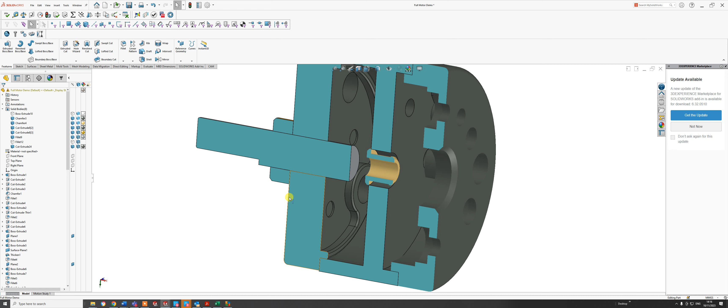As said in the previous video, I need to make some alterations here. I need to get this hole size down to that size there. That was a guess previously, so I'm just going to measure that hole size. Let's see what it says. I'll just move that over to one side.

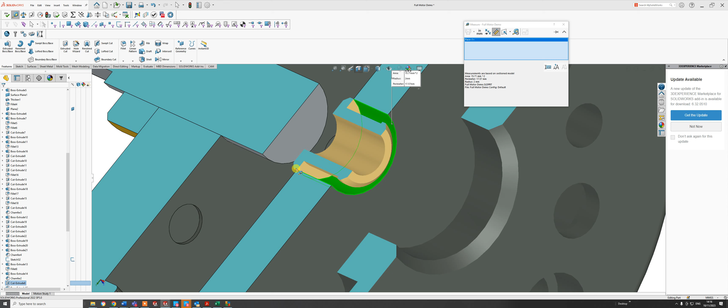So the radius is this, it's a 4mm hole, which is what that measured out to be. Let's escape and measure the other part on that one. Let's do the inside of this just to show what that is. That's 1.5 radius. So all I'm going to do is right-click on there and go into edit sketch.

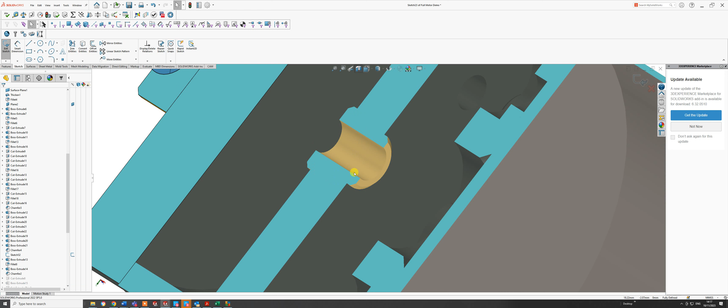What has it done for me? Absolutely nothing. Oh, there's that sketch there, because that's the 4mm shaft. I think when we did that, let's go back and have a quick look how we did that. I think it's in relationship to this half shaft to go through. I'm just going to double check. Take this thing apart. Oh, there's one out. Let's just double check.

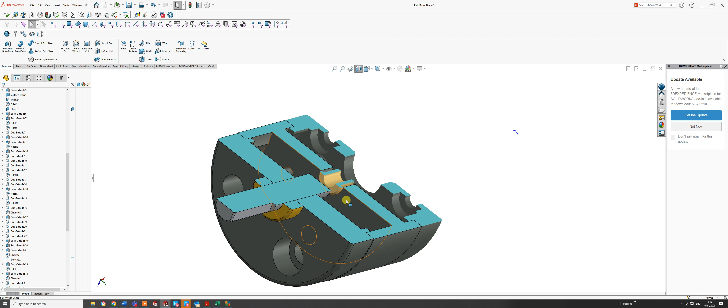That centre bush actually is a lot smaller than we anticipated, so just bear with me a second there. On the underside, it should be approximately 3mm, and on the other side, the bigger side, it's actually gone to 4mm. So I rotate it - that there is 3mm and this here is 4mm.

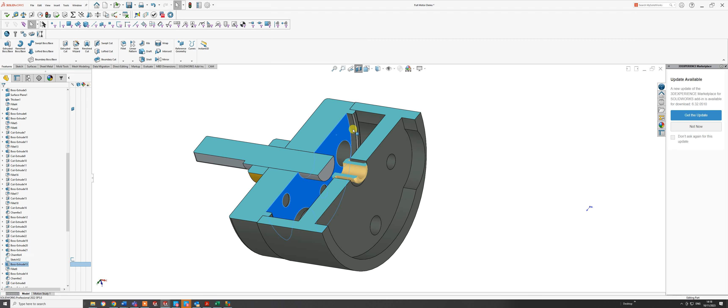So this hole here really shouldn't be there at all. Well, it should be there, but just to these sizes here. I think the easiest thing to do is just hide this, and hide that, so it gives a little bit more clarity. And let's bring this back to there. So it's this hole here we need to look at.

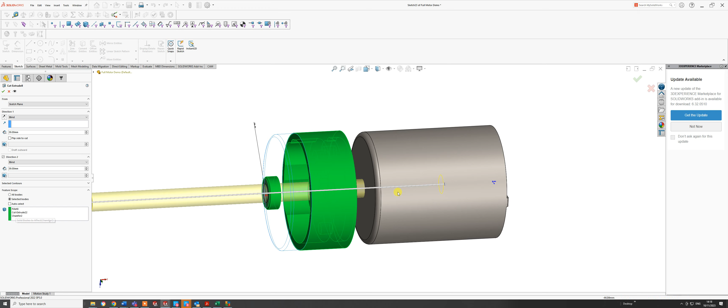So if I go to edit feature, let's see what feature we've got and where that is in our tree. Okay, so we've got several things - we've got that fillet there, got that there, and we've got that there. So what I'm going to do is take off that centre thing, so we don't need to do that. Let's just, it should be the top feature only.

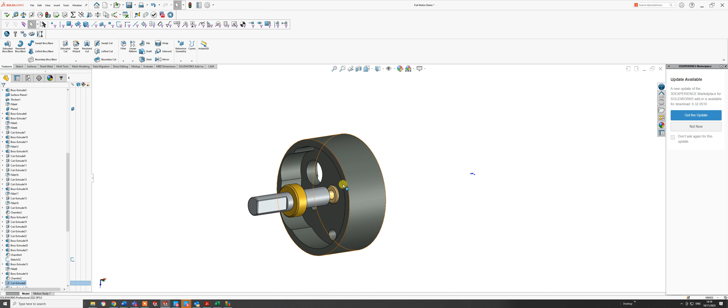So that one, that's the top one we want. That one we don't want, so let's hide that. Let's delete that one, and it will show here that the hole there is being taken down. Let's have a quick look at this and see what happens. Let's go back onto the section tool, and there we go. We are back to normal.

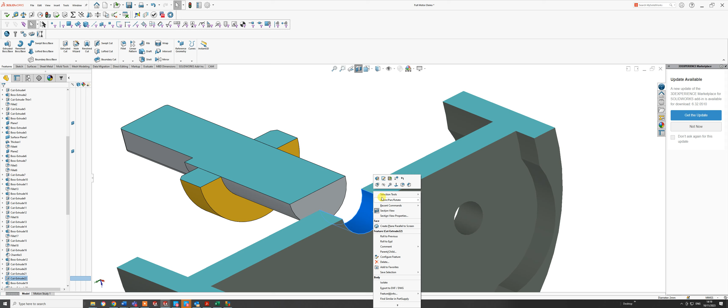So it was just, I'd say, a quick modification. It wasn't actually, because if I now just hide this, let's see what hole size this is. Let's go to edit sketch. There we go, there's the hole size we needed. It's 3mm, absolutely fine, so we don't need to do anything else for that.

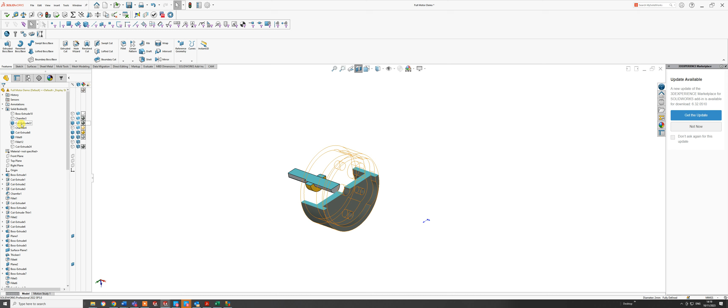But what I want to look at is the other part I've just hidden. Where is that little part gone? There it is there. So let's bring that part back into play. Let's find out where this is. So just down here somewhere. That sketch was that big sketch there.

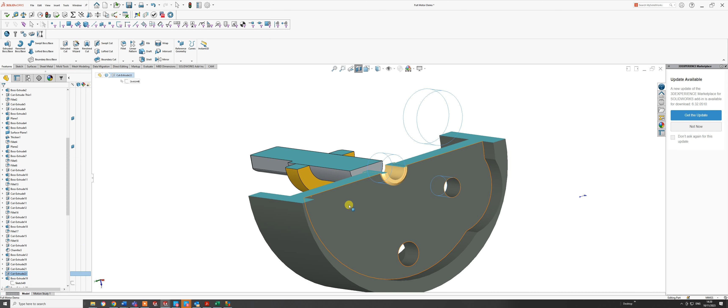I've got a funny feeling. I want to know what the outer is - that's the outer one there. Just bear with. Do that one, that's the hole there. So okay, let's go to sketch, edit sketch. That's the one we did at 3.

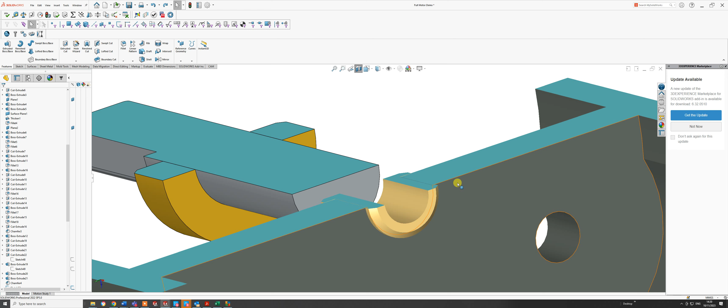Okay, we've done just that bit there. Let's hide that again, and let's - sorry, I don't want to hide that one, I want to hide this. Let's hide this one, and let's try again. Hide. Okay, it's that I want the measurement of there. Let's just look at that. Edit sketch.

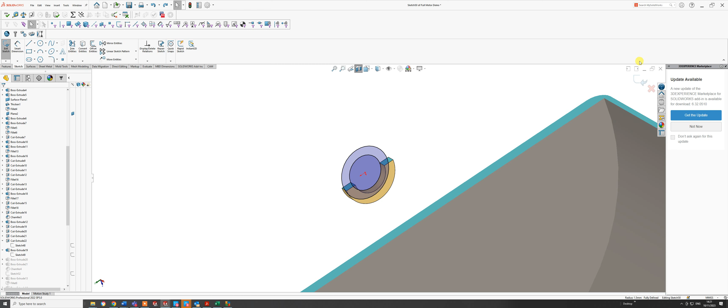Okay, yeah, that's about right. So I'm happy with that, but let's just have a quick look at what the diameter is of that outer. Okay, and that is 3 as well, so it's the same as the hole, so we're okay. So I just wanted to go back and double check all of that.

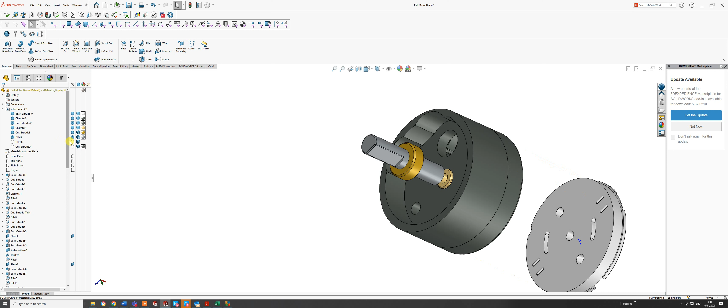So we've made those alterations, and I'll just bring everything back in just to show you that we are okay. I'll go on to this bit in the next video of how to actually achieve that. Let's bring those other bits in - casing, and I need to show you how to do those fins. And there's the top bit. Okay, right, we'll go on to the next video to do that back part and do those fins.

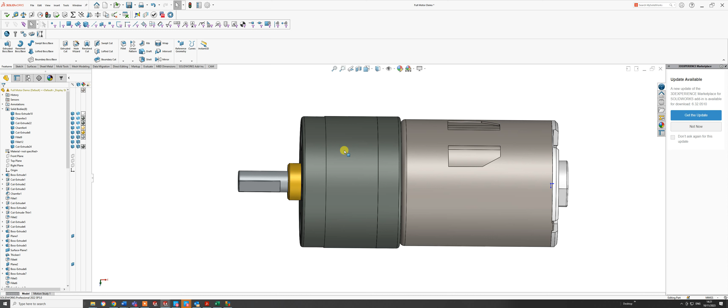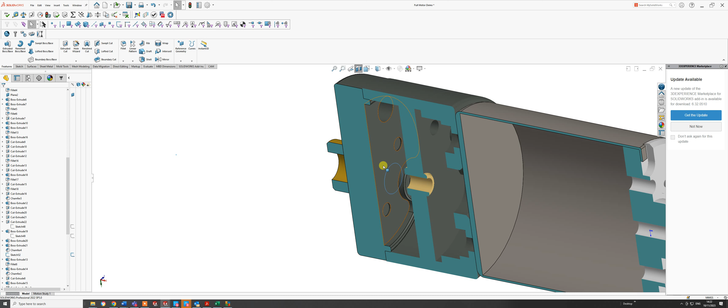Oh, the shaft length - before we go anywhere, let's just have a check on this shaft. Let's go on to that. I just need to measure. We have actually lost a hole here, so I need to adjust that as well. Because if I just hide the shaft for a second, you can see there's no hole then. There needs to be a 4mm hole. So if I just Control Z, let's go back.

Okay, and I think that was probably because I did that. It's quite easily sorted. So if I just go back to this one here, let's bring the - got one, let's come back down to that one. So I've just gone back. Let's put that hole in. Sketch, sketch. Let's do it on that surface.

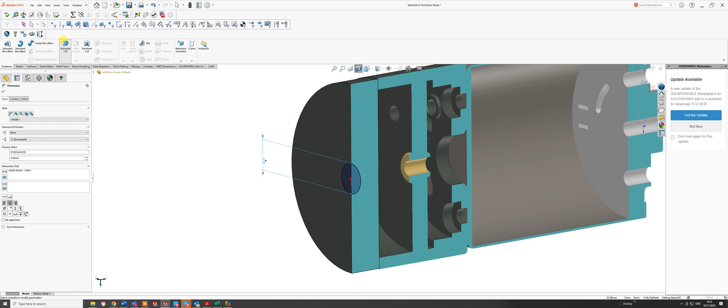Let's do a circle. Come out to 2mm. Let's go to smart dimension. Let's go to 4mm. And features, go extrude cut. We can do a through all, or blind, or up to surface, but let's just put it through so I can see roughly where it is.

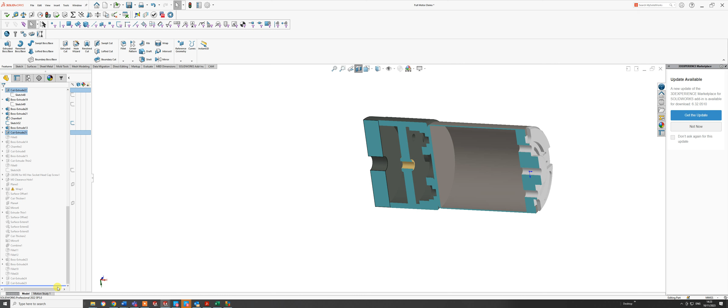That's fine. It's a little bit of a lazy way of doing it, but that's that. So if I now go back up to switch, or if I come down, bring this all the way down, you'll see that the shaft now goes all the way through.

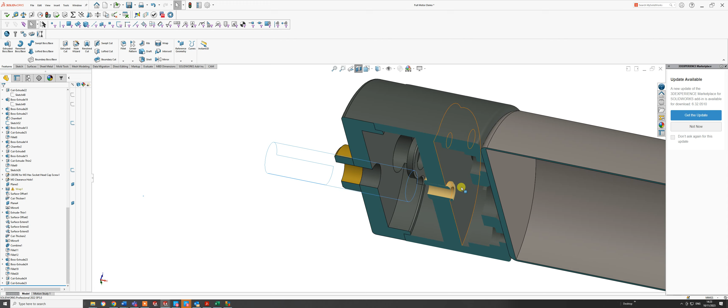So what we need to do is actually do this boss part of it, which will be similar to the back side of the other one and the top. So we can do that now. So if I just hide this, let's just hide that.

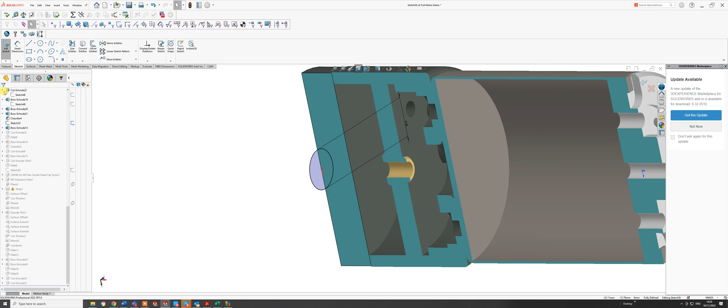So we want to sort of replicate this there. Actually this should be a little bit different, so let's just go back and edit that sketch again. I put 4mm, let's put in 4.5. Or let's just put in 5mm, so it'll be a 5mm hole. It should change, just double click on that. That's it, 5. And that gives us about 0.5mm of brass to play with.

That's a tick. Okay, I've got errors up, I know, because it was probably because of that there, but we can talk about that in a bit.

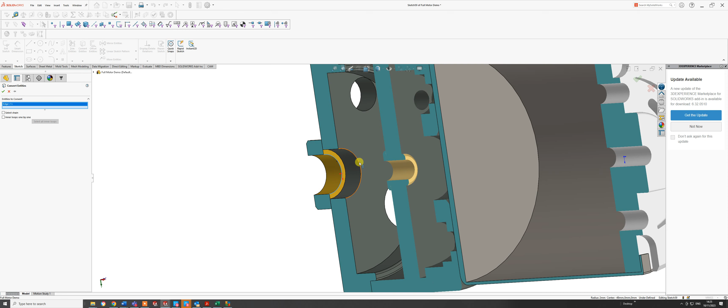So all I need to do now is go to sketch. I want to go onto that surface this time, and what I'm going to do is convert entities first. I'm going to convert that entity of that inner one and that one. Okay, so got that circle there. And then I want to draw out - was that done already? No, I then want to sketch another. So let's just do that bit first.

So, features, extrude boss base. Okay, I want it to go the other way. I'll go up to next. Let's just do that. It should go up to next. Reverse. Merge results. Let's take that off.

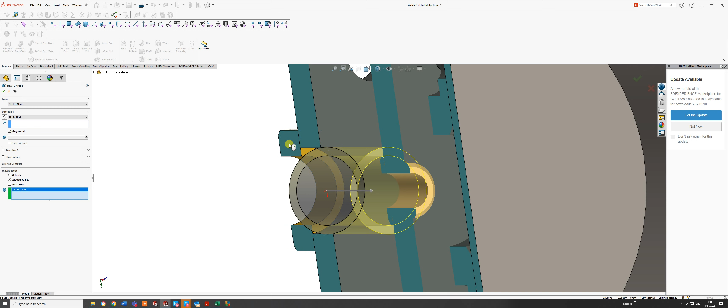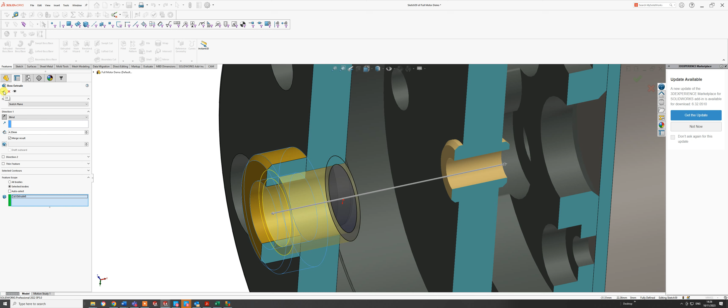Let's just - my computer's frozen for some reason. That's it, let's go up to that. I did have up to next, but let's just flip it around. Reverse, that's better. And go up to - actually I'm just going to pull that back in. I'm cheating a little bit, I know. Got extrude, let's just check that one. And that should have done that.

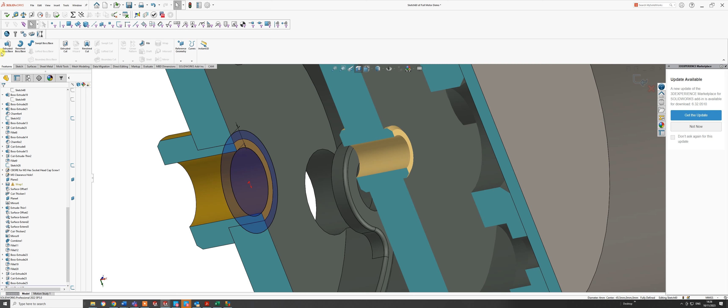Okay, and then just to make it a bit tidier, I'm going to go to sketch again, on that surface this time. I'm going to convert entities, so it'll be that inner one. And then I'm just going to offset. Let's try 1 mil, see what that does. Yeah, perfect. Okay, and then go to features, extrude boss base. This just has to be a fraction, so let's go 0.5 of a mil. I could probably get away with less than 1, to be honest, but we can change that.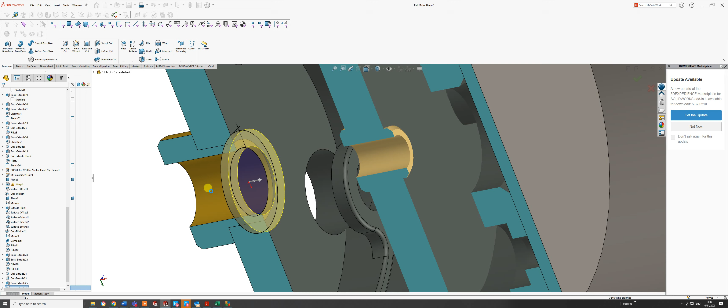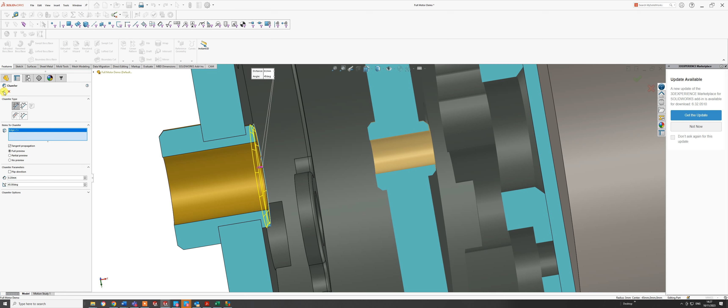And yes, I do want it to merge, but only with this one. Okay, so that's another something, and that's that merge. And then what I can do is go to chamfer, and I can't remember what dimension I put on there, but it's not 10 for definite. So let's put in 0.2, and there we go. We've got a nice little chamfer on there, and there's that part. So that's us sort of finished those little bezel shapes.

I think there's still an issue here, but we can go back to that in a bit. So let's just bring that shaft back. Where's my shaft? I think it's that one there. Maybe, yeah, there it is. So now we've got something that shaft actually runs in.

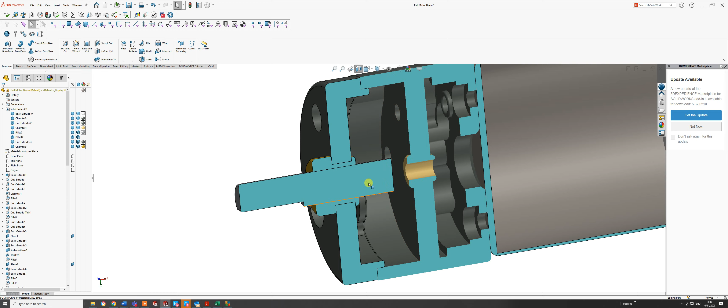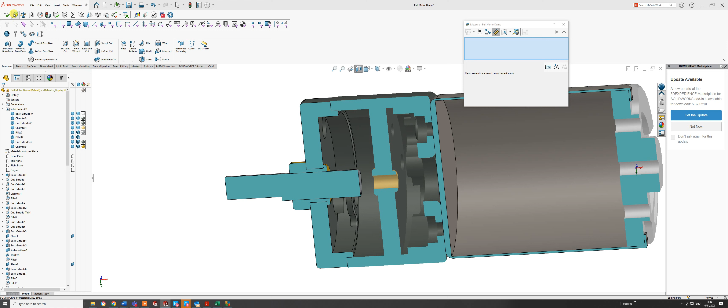Now the length of that shaft should be, if I get this right, 21 millimeters. So again, what I'm going to do is take my little measuring tape. I'm going to go onto that face there and that face there, and it says 19.51.

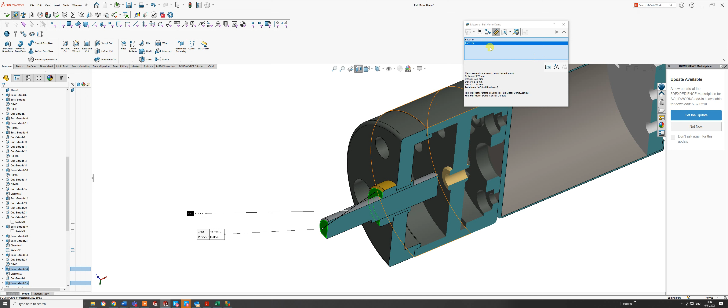Okay, so I can also double check if I just press escape what the distance is from there to there, because I know what this distance should be. That's 9.7, shortest line. I need to go the minimum distance, face 1 to face 2 minimum. I don't have that marked on here, but let's go - I'm in that one, point to point. Let's go to minimum distance. Okay, there we go, it's in the purple, so it's 9.5 on there, and let's just check that's correct.

Oh, I just pushed it out. It's clever, Gordon. And Arthur's just having a little bark. Yeah, 9.5, so we know that's fine.

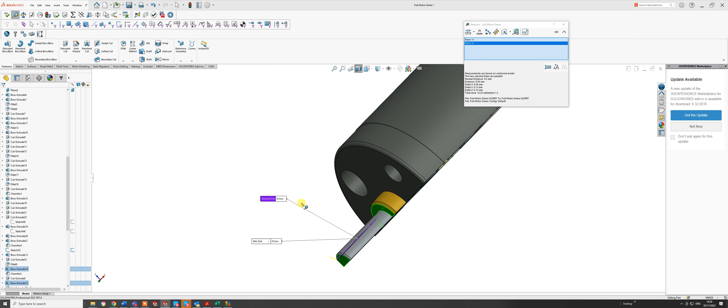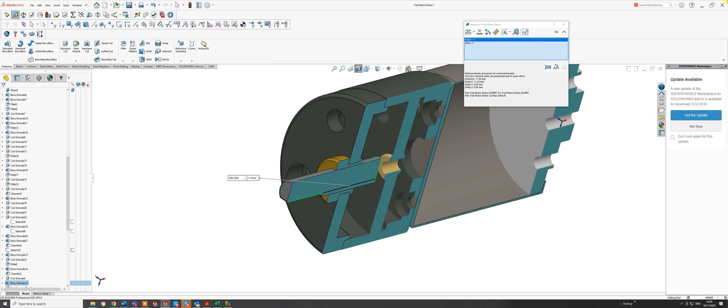So it's this end that needs to change. So let's just double check that one more time, because I've forgotten what the - so that to there. Okay, that should be the shortest distance, and that minimum distance, 11.5. Have I done that right? No, let's just try that again. Let's try once more. If in doubt, do it again.

Okay, that is 19.5, so I need to add 1.5 onto this other end. Let me just double check that again. So just using the verniers, yeah, it needs to be 21, 19, 1.5.

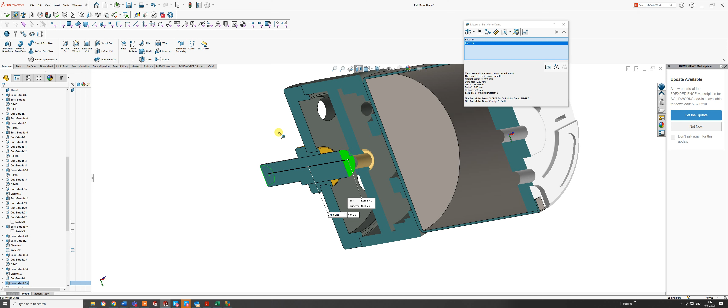So what I can do is just go on to this one, just right hand click on it, go to edit feature, and let's just see what it says here. So that's direction 2, it was 9.5. Let's just double check which ends is which. So if that's that, let's just do that at 11.5. Let's try that - yeah, that's fine. And I'm sure that is correct. We can change it again later if not.

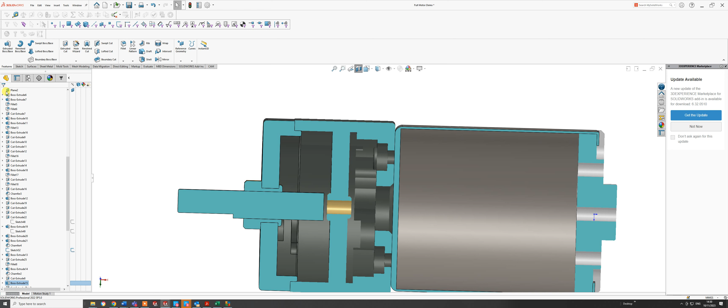So that's now at the correct length on there, 21.5. Brilliant. Okay, in the next video we'll look into this, and we need to do the gears as well, but that gets a little bit fiddly, and I'll do the fins for the gearbox here.